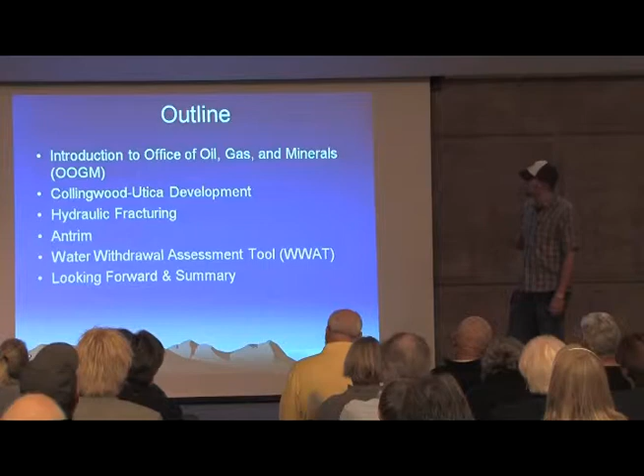Going over the Collingwood Utica development, that's what really kind of brought this hydrofracking issue to Michigan's attention. What is hydraulic fracturing? The Antrim play, water withdrawal assessment tool, so that we actually keep an eye on the water that they use.

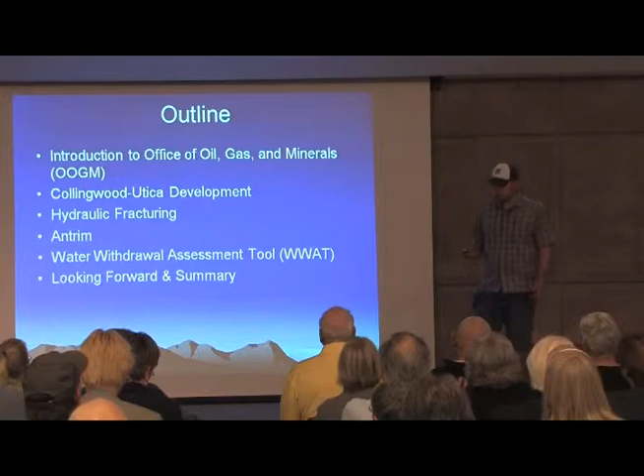Looking forward and summary. Basically, Office of Oil, Gas, and Minerals, we're here from cradle to grave, theoretical cradle to grave, on oil and gas drilling.

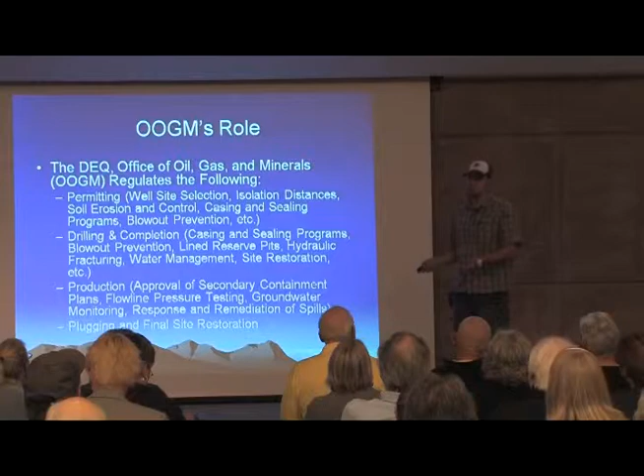Companies obviously aren't going to tell us what's going on, because once the state knows, they have to tell everybody else, and there goes their plays of what they want to do for an oil and gas drilling project.

But from permitting, there is a full review of the permits to make sure that the casing, sealing, cementing process, everything along those lines is actually gone over, verified, and ensured that there is a competent sealing, casing program and protection of Michigan's natural resources.

Through drilling completion, we're on site to make sure that they're drilling using the proper fluids. If there are a little bit of spills here and there, that they clean them up instantly, take care of the stuff, lined reserve pits, a lot of other stuff.

Some of the stuff looks like people might not be able to read at the bottom, but for the well, if it's a producer, production, facility construction, secondary containment, things to make sure that this stuff is kept where it's supposed to be and not in our groundwater, because everybody likes fresh water to drink.

Plugging and final site restoration. So we write the plugging instructions, make sure they're doing it.

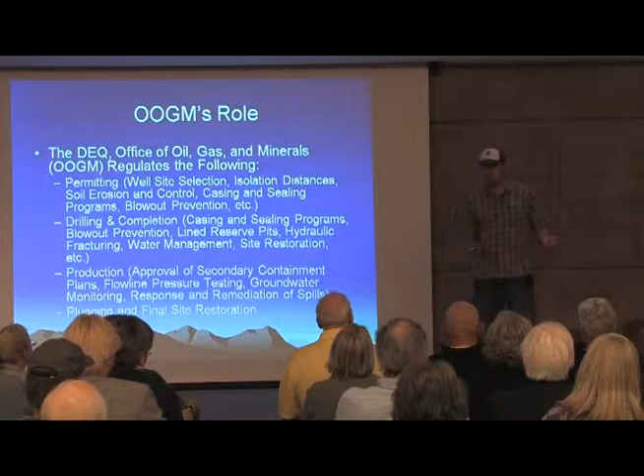In fact, my apologies, I didn't realize this was going to be so big. I don't have a shirt or tie on. I just came from watching a plugging program that I've been stuck on for the last week, so my apologies for my drab appearance.

So permitting, surface ownership and mineral ownership. That's one of the things that really causes a lot of problems. Thanks to English law established way before I was even thought of, mineral ownership is allowed to be fractured from surface ownership.

However much that might be an annoyance, I'm sorry, I have no control over it. But if you're the mineral owner, you do have control over those minerals, and you have the right to either lease or not lease your property. There are other things that can come into that, and we'll discuss those later.

Surface ownership, they still have to get permission from you if you are just a surface owner to be able to come onto your property. You don't get any of the nice mineral rights or anything along those lines, but there's that stuff.

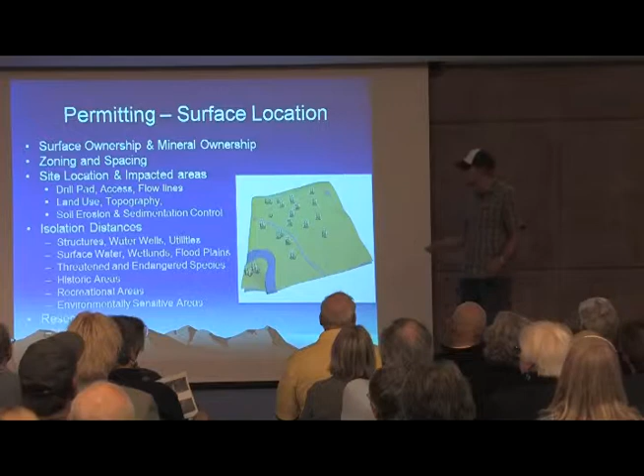Your site location, where the drill pad's going to be located, wetlands, natural protected species, soil erosion processes, things like that along those drilling pads. We go through every detail of this before they go in to drill it.

Your soil erosion and sedimentation control, isolation distances, you have to be a certain amount of distance from structures, water wells, etc. And then your reserve pit, the location, if allowable - and that's because some locations you can't have reserve pits on because the groundwater is too close to the surface, or other issues might be presenting situations that you can't have that.

There'll be a question, I'm going to try to get through this real quick so that we can have some questions and answers, but I will call on you first, sir, when we get there.

Zoning and spacing. Does Michigan law allow for local zoning ordinances to deal with this? With drilling, no.

The state has the right to it. With companies not being able to keep track, there'd be too many options out there for companies to manage, from what I understand up the chain above me. So the state just handles the spacing and zoning issues for that.

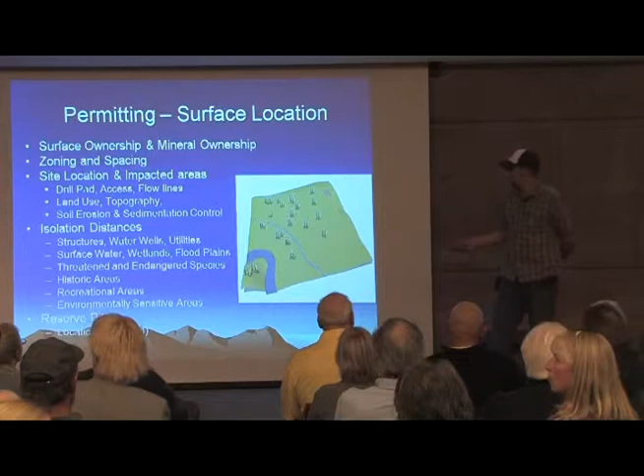So we'll go to the next one: permitting and casing. So the casing, like I was saying, we go through and review that. Surface casing, the first one, is basically made to ensure that groundwater is protected. You have to go 100 feet into competent bedrock and below the lowest known freshwater aquifer. Now this can fluctuate in multiple depths. There's formations and locations I've been at where I've had surface casing down to 900 feet, if not deeper. There's other ones where I've only had it to 500 feet, maybe 300. It just depends on the area geology.

There's a lot of science behind this stuff, and I am a geologist and I like rocks, so make your judgments right now. But I'll be going over this stuff and the different rock mechanics and things along those lines.

Your intermediate casing is something that's used on some of your deeper wells. It's basically just to ensure that there is more competency to the well bore, make sure that there is more safety and that it's actually sealed off so we have another safety control point for the well drilling. Contingency strings can be used if there's local hazards in the geology, like lost zones or overpressurized formations. Salt structures like to collapse occasionally, and so maybe you need a little bit stronger pipe in the hole.

Your production casing all the way down needs to be cemented back up so that there is a good seal around that target formation. With the horizontal stuff that's really starting to spark a bunch of interest with the citizens, there are new casing rules and cementing procedures in place that have got a little bit more protection to it than we had before.

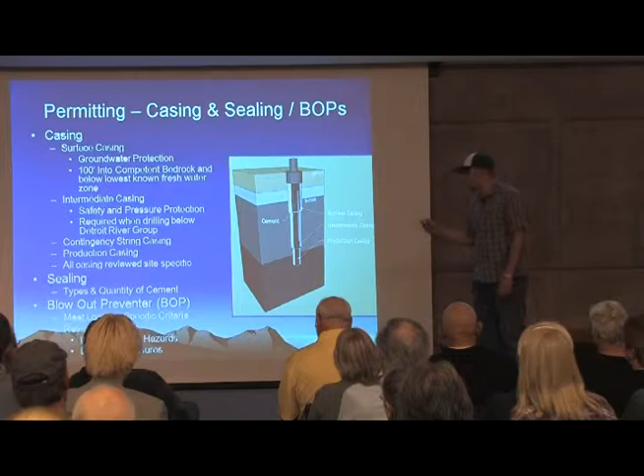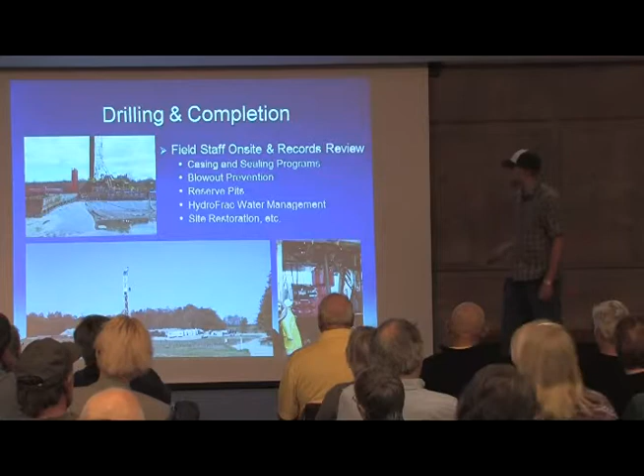Surface casing - this is going to make it look like it goes real quick, but drilling can take 3 days to 60 days, or maybe even further, depending on what they're actually doing. So if you're looking at your leases and somebody's drilling next to you, you could have a rig drilling next to you for a long time, a lot of sleepless nights. Keep that in mind.

But with your surface casing, it doesn't go that fast when they drill it in there. They got to go down 100 feet - this is showing where the base of the freshwater is, and we'll say that it's competent bedrock for this presentation. They run their surface casing in, they cement it back to surface. They have to wait 12 hours before they can even touch that casing and drill out to go into the next one.

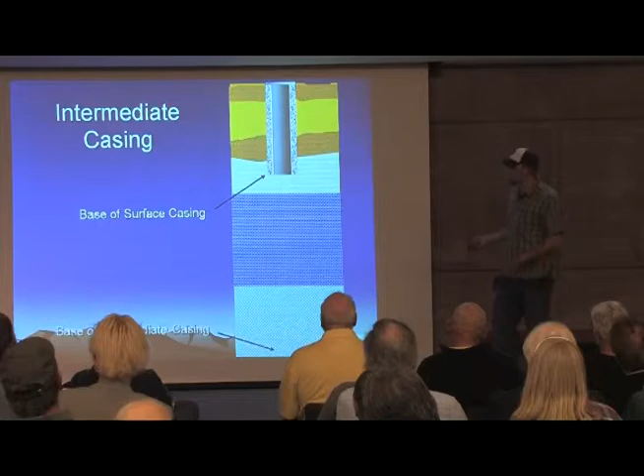Your intermediate casing string, on some of these deeper holes that you'd end up using - once again, they drill it, go with their casing, cement it back up, and then there we go.

Now your production casing, with these horizontal wells that is causing all the buzz about hydraulic fracturing - there are a couple of companies that you'll notice have a different kind of setup here. A couple of companies like to go down, drill a vertical well, and actually core. You end up getting a 3 to 4 inch core of that rock so you can see what it's made of. Is it worth doing the horizontal section, or should we just cut our losses and get out of here now? So they'll end up drilling that, and they end up having to plug that all the way back to what's known as your kick point.

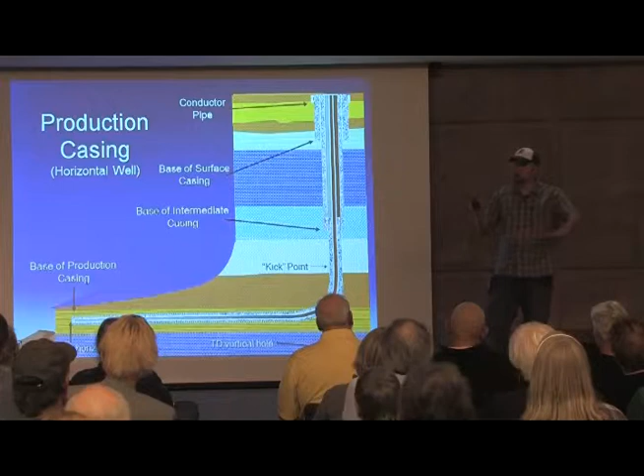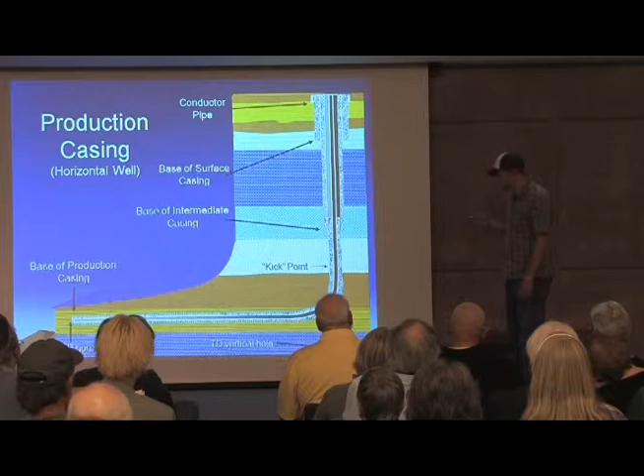The kick point is basically just where a company's going to start that nice bend to go into the horizontal section. That can last up to about a quarter mile. Steel pipe bending over a quarter mile, a lot of things are possible, so then they run the horizontal depending on how long they're going to run it.

Production companies cannot create production facilities without our approval. They have to submit plans, we change them a lot, to make sure there's secondary containment underneath these tanks. Their flow lines have to be pressure tested. If there's a spill, even if it's contained, they have to make sure everything's taken care of and safe, and we have routine inspections to cover it.

Are we there 24/7? No. But we do go there quite a bit, and it's pretty easy to tell if there's non-native soil where there used to be a nice patch of grass, so you can find out what's going on there.

And then Lansing has production and records review to ensure that everything we're seeing out there on location actually matches what the companies are submitting for truth.

Plug-in and final site restoration, we issue the plug-in instructions. We make sure they get the system so there's no erosional conditions. The one thing is they're not going to make it back to that beautiful prairie you might have had before. They're going to go in, level it, and it becomes a flat square.

So most of your average ones around Barry County would be maybe a 200 by 200, or maybe a 300 by 300 site. Hydraulic fracturing pads require a lot more space, they're massive, a lot bigger. So you are going to have a nice open wooded area.

If it was a wooded area, they don't plant the trees again. They just go out there, seed it, make sure there's no erosional issues, vegetation's established, and the well's cut and capped below grade, what's known as plowable depth. It's about 4 to 5 feet down, and that's what you end up with if it's a dry hole.

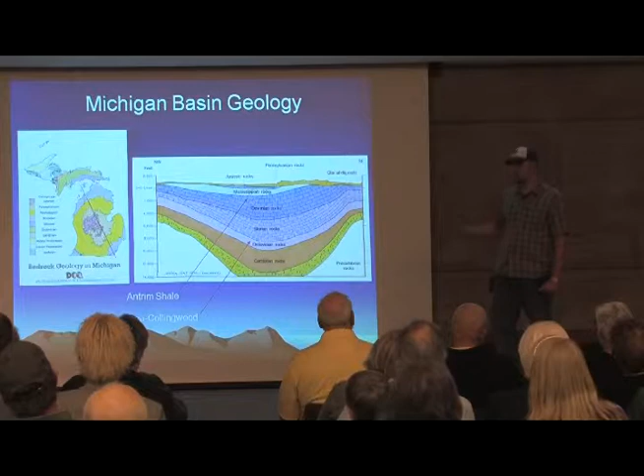But you've got your different ages of rocks, and in those are different formations that have oil and gas bearing potential. One is the Antrim Shale, which we'll be talking about, a relatively shallow formation that's had a lot of play up north in the northern lower peninsula. And the Utica Collingwood Shale, which has brought this really to the forefront of the media and citizens' concerns, also in the northern lower peninsula. None of those are... well, we'll discuss that later.

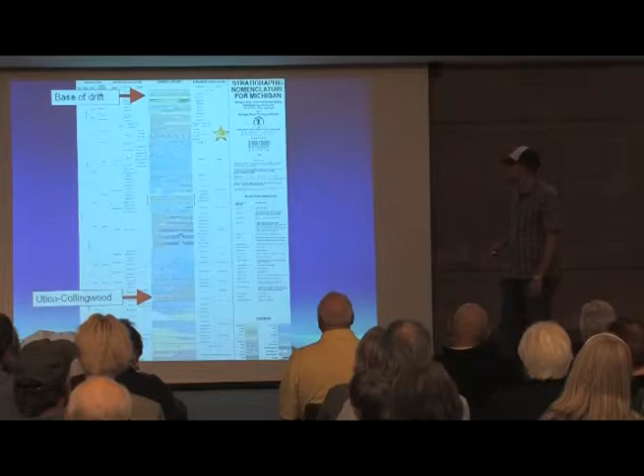So, Utica Collingwood is pretty deep, but as you saw from that bowl-shaped geology, depths vary depending on where you are in the state. Our base of drift — drift is the sand, rocks, dirt, topsoil that's under our feet, that's what drift is — that fluctuates throughout the state as well. I think it's 22 feet in some areas and 900 in others.

So the Antrim is this nice star right here, and that's just to show you the approximate closeness of that to the base of drift. This is not to scale, it's to show you all the formations that we know about.

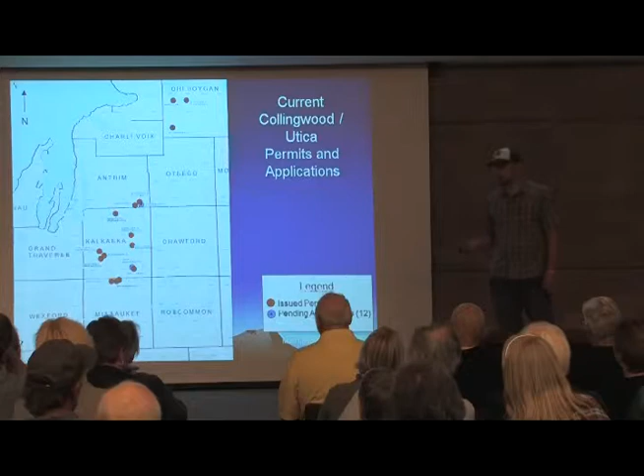So the current Collingwood Utica permits and applications: as of now there's about 21 permits that have been issued. With gas prices being so low, it seems companies don't even want to go in and explore it, because if you're not going to make your money back, why would you drill the well in the first place? There are pending applications right now because companies are interested in this — there is a potential good source of gas here.

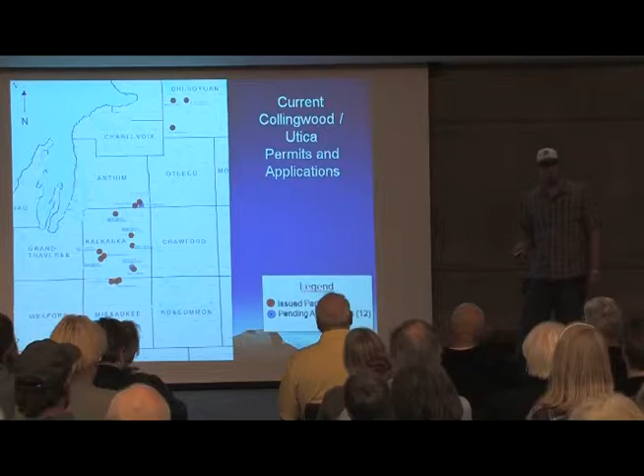It is in a tighter formation, the tight shale rocks—well, Collingwood is actually a limestone, but we'll get into that later. So, Utica Collingwood geology, bear with me, I'm a geologist, I've got to talk about rocks. Your Utica shale, that's a big play they're getting into in eastern Ohio right now.

You may have heard about it in the news. They are doing these large-scale hydraulic fracturing systems down there and finding extremely good quantities of gas for production. The difference between the Utica shale in that eastern Ohio play compared to Michigan's is Michigan's has a much lower organic component. Lower organics means less production of gas or oil from whatever is dying and decomposing in there.

The Collingwood, however, has always been thought of as a shale until just this recent play, and it's actually a dark, organic-rich limestone. Looks like a shale, acts like a shale, but it's actually a limestone. So with some shale-like attributes to it, the hydraulic fracturing they've used on it is basically one way to help release those oil and gas components.

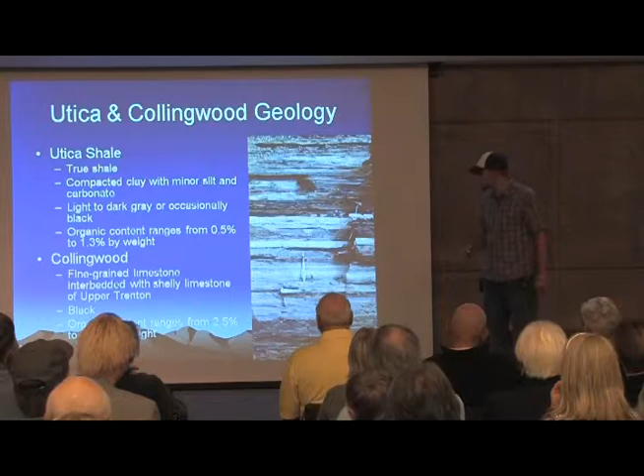So our drilling and casing program, as I was saying, fluctuates from one spot to the next. There is no standard well program. Your conductor pipe—this one based off of wells in Kalkaska and Missaukee counties—is driven anywhere from 60 feet to maybe 100 feet. That's just to get a starting point for the people to start drilling.

Everything about this is a normal oil and gas well until you get into that kick point to begin the drilling. Then your surface casing for these wells goes into the Coldwater Shale, at 704 feet—some are actually a little deeper than that. It's to ensure there's complete coverage of those freshwater aquifers.

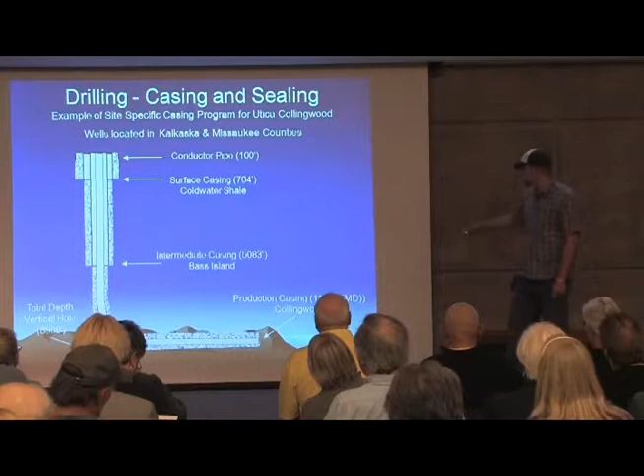Your intermediate casing shoe is down in the Bass Islands—it's competent rock down there, but you can see it's at 5,083 feet. Then you get into your production casing. The true vertical depth is actually only around 8,900 feet, but the measured depth is 11,133 feet. That's a really long section of hole drilled horizontally.

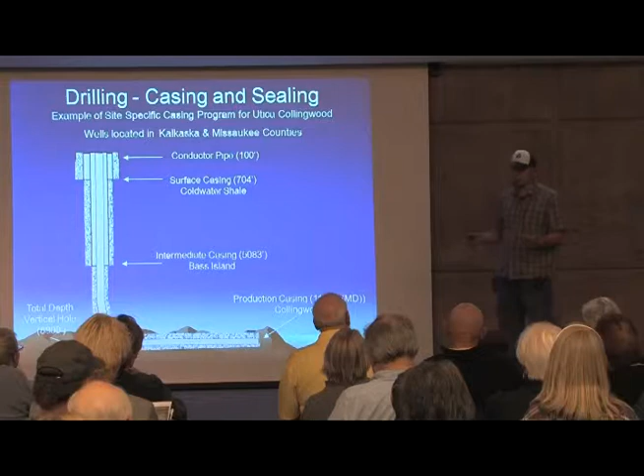So the main reason to do that is to open up more formation to get more exposure so you can get more oil or gas—whatever you're looking at—for this particular case, gas.

So then we're looking at Cheboygan County further north. You can see there's a big change here. Your conductor pipe is basically the same, 100 feet. The contingency string though—there are formations up there with soluble bedrock that you don't want to drill through and let the rock dissolve, and then all of a sudden you have these giant caverns down there. So we end up having a contingency string to ensure the hole stays competent while drilling through those cautionary zones.

To get down to your surface casing—it's now at 1,300 to 1,400 feet. That's pretty deep, but it makes sure all those usable aquifers are cased off, because there are bedrock formations that people have water wells in. If there's a water well there, we've got to seal it. We've got to make sure nothing gets in there to cause problems for it.

Your next intermediate casing goes into the Niagara Formation, which has a bit of oil and gas play to it, and then your production string goes all the way down to the Collingwood. So for this particular case, you've got 4 strings of casing plus your conductor pipe, but I don't count that as casing.

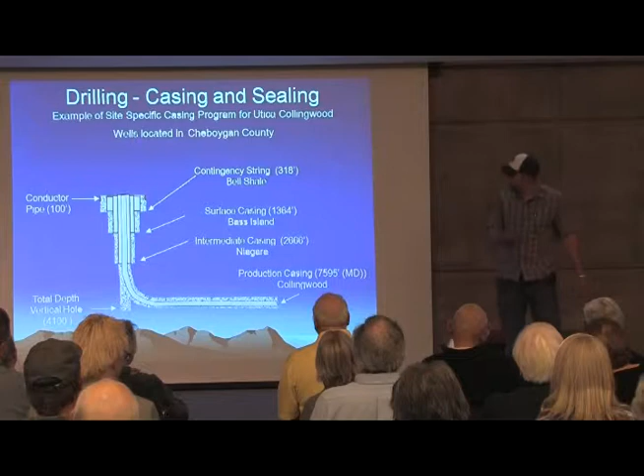Spacing issues are really coming up. Your standard spacing is 40 acres for most wells. Some others are in 80-acre spacings. Others, like the Collingwood, have nothing really set for it—it used to be just a junk formation everybody wanted to get through, and who cares about it. Now it's something of interest, and we need to find out what the actual drainage of that is.

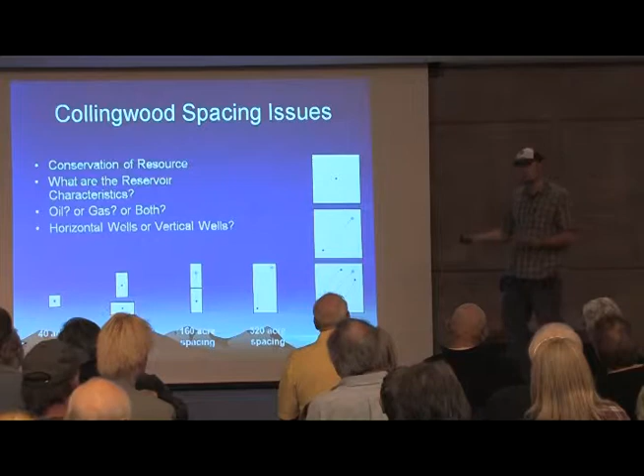What makes sense? We don't want to have wells on top of wells on top of wells, because that really wastes our natural resources at the surface from making these drill pads. So if we find out that it's 640 acres, a square mile, then that's what the spacing will be. There's currently a hearing going on about that, and eventually a decision will be made.

Your large volume hydraulic fracturing water usage.

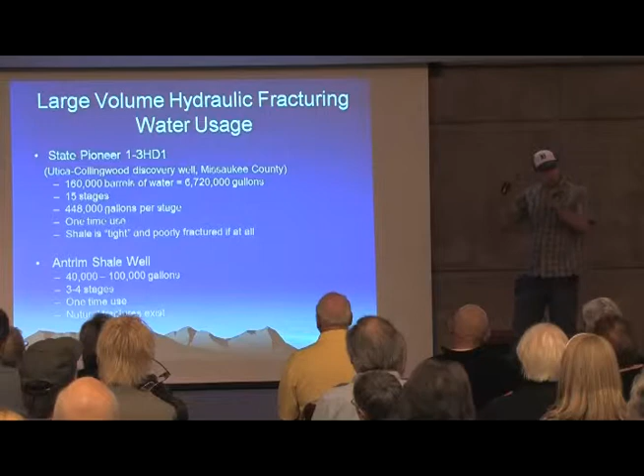This is something that really scares a lot of people. You hear about it - here in the State Pioneer, 6.7 million gallons of water was used. This is done in 15 separate stages for hydraulic fracturing, and we'll go over that in a bit, but this is a one-time use. In comparison, they withdraw it, and I'll tell you about the things we have in place to make sure nobody's wells go dry. They withdraw it and use it with their mixture to actually get into the tight shale to fracture it. Your Antrim shale wells, which have been around a long time, use around 40,000 to 100,000 gallons. It's a vertical well though, so a little different, but hydraulic fracturing is still used to help open up naturally occurring fractures in that formation.

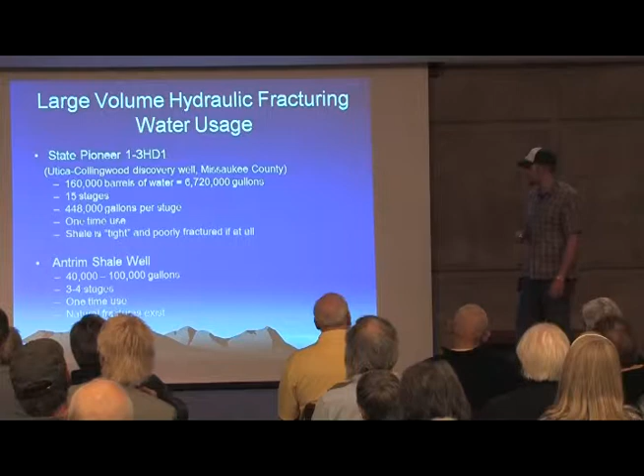So how much is 6.7 million gallons? Here's some things to put it into perspective: 10 Olympic swimming pools, or roughly 10 acres of corn use over a growing season. That's a consistent draw from irrigation systems over the whole season, spaced out over a longer period of time compared to a shorter period of withdrawal here. Or your golf course in roughly 33 days - definitely not a fancy golf course, more of a hack course.

But with that withdrawal, there's a big concern. As you put big stress on your aquifers, if you're pulling out all that water, you get a situation where your water table actually starts to cone or depress downward because you're having a large draw on it.

What we have in place is, with any residential well that's within a quarter mile of that source well, they have to have monitoring wells in between, monitored on a daily basis to ensure that as they're going through water withdrawal for this hydraulic process, the water table does not dip. If it dips, stop what you're doing and see what happens. If it rebounds, okay, we can start that process again. That's to ensure nobody's well goes dry while they're doing this process.

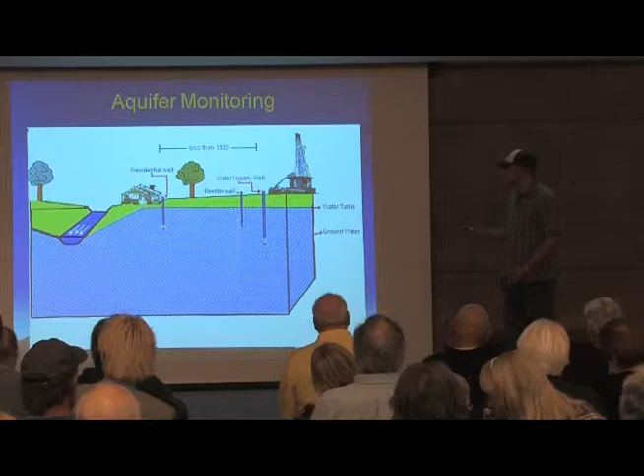Depending on the soil they're pulling from - maybe it's a sandy soil, water easily moves through sandy soils. But let's say it has a really high clay component - water doesn't move that well through clays, so there might be a slower rebound. We want to make sure no one has to worry about a dry well - there's nothing worse than going to the faucet and not having anything. But the water does rebound, and it ends up being replaced through the whole water cycle, and we'll go into that also.

Hydraulic fracturing - what is it? It's actually just a completion process for the well. There's a lot of talk that everything, from trucking etc., is hydraulic fracturing, but what actual hydraulic fracturing is, is a procedure used to complete some oil or natural gas wells. They pump water down the properly sealed, cased well into the target formation, varying in depths, and actually perforate into the rock, forcing it at a high pressure, higher than the natural pressures of that rock formation, to cause those natural fractures to either open up or to create man-made fractures, to get the sand in there and open up those formations to let the gas or oil come out easier, to make it a producible quantity.

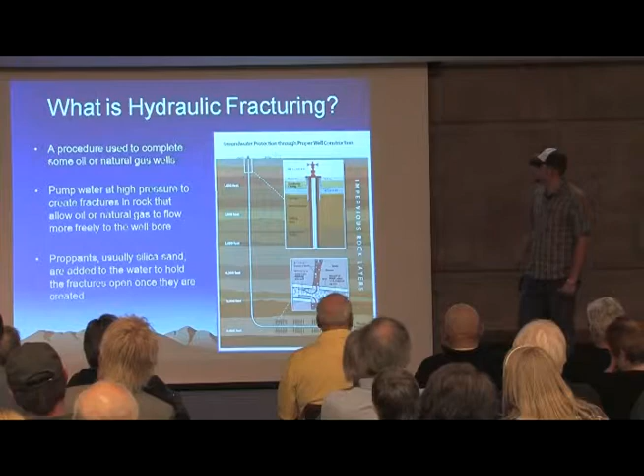Proppants usually. So again, hydraulic fracturing - there's a bunch of different dictionary terms out there, and you'll see a whole bunch of other descriptions of it. Basically, it's a process to complete the well. They use water, sand, and a small contingent of chemicals, pumped down the well at high pressures to open up the fractures in that formation to help release gas or hydrocarbons that they're looking for.

But still, you know, it's 99.5% water and sand, and 0.5% is chemicals. But 0.5% of 6.7 million gallons is still a bit of chemicals. This is all stuff that's contained in systems as you're pumping it down into the formation - it's not something they're just throwing all over the location.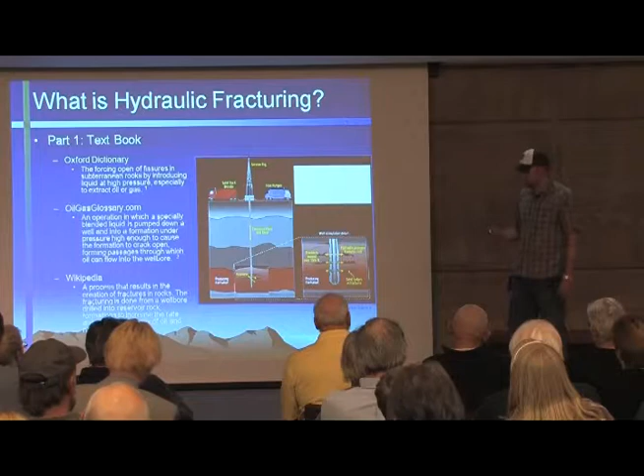There's a lot of problems with the debate on it. You have your lobbyists that say hydrofracturing is just this little tiny thing right here. Then you have opposition groups, which include a lot of other stuff from drilling, trucking, everything along those lines. It's even some things that aren't even related to hydraulic fracturing.

The main concern is really, in all seriousness, probably somewhere in the middle, because there are things that go with hydraulic fracturing, truck traffic, things along those lines that you can associate with it that might cause disturbances or noises in the community. And there's other things that aren't really associated with it, like some of the things that I've seen on some websites.

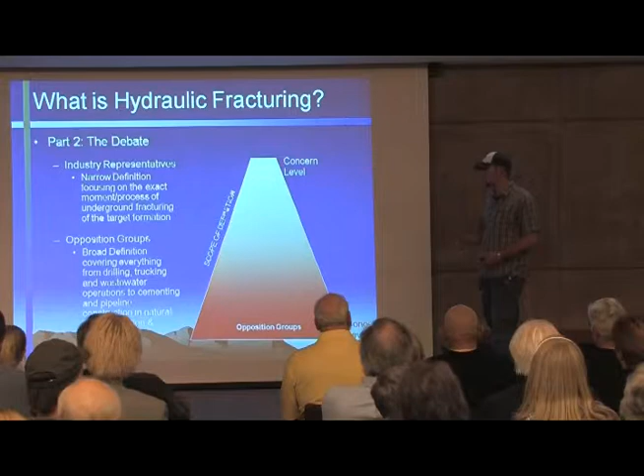The history of hydraulic fracturing is not brand new. It's been around since 1947, at least that's the first one on record in Kansas. Good friends Halliburton decided to get the license in 1949. Over the next years, we've actually had improvements in understanding of rock mechanics, which chemicals actually work better for it, modeling, some engineers have gotten into it, and there's a lot of information and a lot that we have learned about it over the time.

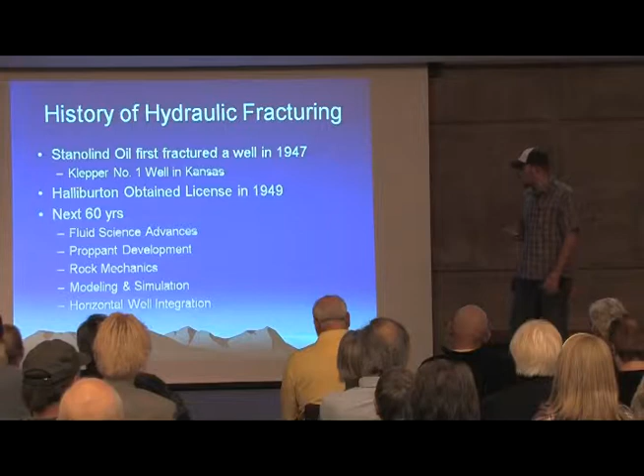In Michigan, state regulations, we have casing, sealing, water withdrawal. We oversee the whole process of it. I can't stress it enough that everything in this is reviewed and there's no item that's overturned.

We review the completion plans. The MSDS sheets are on location, and recently we have been starting to put them on our website as well. We are also working with fracfocus.org to get those chemicals on there.

Depressingly, there are some federal laws that do not allow us to disclose certain trade secret chemicals. It sounds like the Democratic Party and the Republicans are trying to work together to try to get that as a law for here, but we'll see how that ends up turning out. But if you've got something that works great, you probably don't want to let your competitors know about it, so I guess I understand.

Hydraulic fracturing in Michigan, though, the first well on record is in 1952. It was done up in Lake County, and since then, over 12,000 wells have been hydraulically fractured in Michigan. These are mostly in the Antrim plays up here in the lower peninsula, the Antrim shale. They're relatively shallow, and they've had over 12,000 wells done.

All of this has been done without a single incident, any sign of adverse impacts to public health or the environment. So 12,000 wells, the track record's pretty good, but that doesn't mean that you pull back and say everything's fine. You still have to stay on top of this stuff and make sure that it's good.

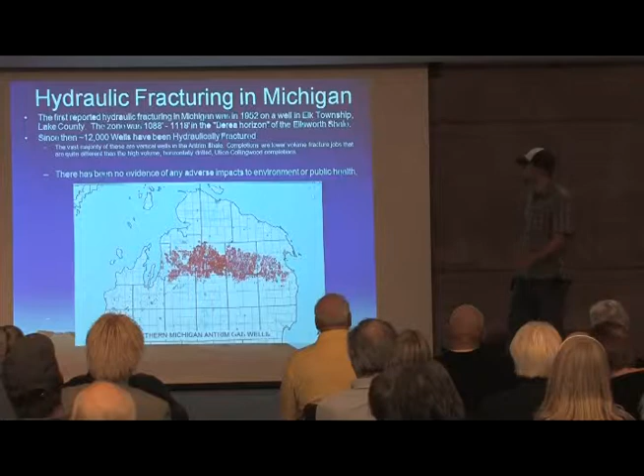The vast majority are in the Antrim, I already said that. But this is what I was talking about: your normal drilling location. From what I understand, most industry representatives in Barry County are looking at dolomite, limestone, maybe some sandstone formations. It sounds like land leasing, no one is even willing to put in there 'do not hydraulic fracture' on my property, in those leases.

It depends on the company you're looking at. Of course, the companies aren't going to tell me what they're looking at, so maybe there is the possibility, but I don't foresee it. I have been wrong in the past, though.

This location is ginormous. That's a school bus at the top. So that gives you a nice little scale there to show you exactly how big this is.

Your freshwater pit causes a lot of concern too. People think that this is a pit where they are mixing these chemicals and everything up together. There is nothing that can go in that freshwater pit besides fresh water, maybe a duck lands in it or something along those lines, but that is solely for fresh water, for staging area, so that they have that water on hand, because when they go to do this process, you're moving a lot of water, a lot of fluid, and a lot of sand all at once to crush that down. You need these storage spaces to have that fresh water. So no chemicals, nothing but fresh water in there.

You've got your different systems here of your frac tanks, your pumping trucks. There is a lot of commotion going on here, a lot of traffic going on to this location, and as you can tell by the scale, it is a bigger location.

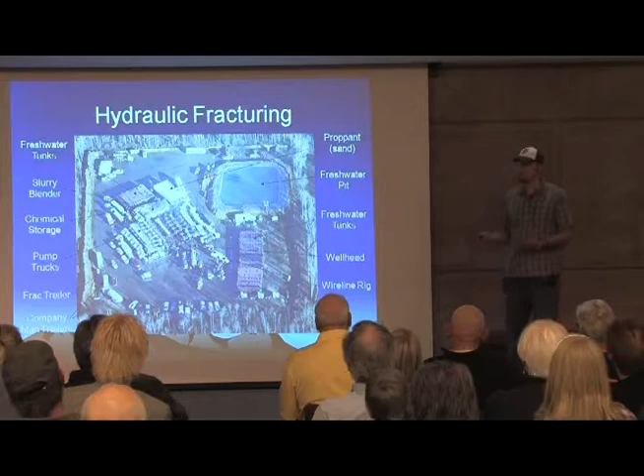Hydraulically fractured locations need a much larger scale. Most of your normal wells are 200 by 200 feet, maybe 300 by 300. The 5 most common issues: migration of gas or fluids into fresh water or to other formations.

Some people might not care if something goes to another formation, but I do. I like to try to keep everything in the formation that it's supposed to be in.

Your identification of chemicals and additives - we require the MSDS sheets to be on site. If something were to happen, we know what we need to chase. Even though they're trade secrets, they still have to let us know what chemicals are there, or the overall chemistry, so if something were to happen, we would know how to respond.

Your management of flowback water. There's been all sorts of stuff on the internet about where flowback water goes. In Michigan, no flowback water can go to the reserve pit, where the drill cuttings go, nor to that fresh water pit. All of that flowback water has to go to concealed frac tanks that are on plastic liners so there is no possible leaking into the area. I'll show you some pictures of the stuff I'm talking about. There's a lot of jargon here, and I'll try to minimize it so it's more understandable.

Your surface spills - that's where I'd be more concerned, if something were to happen at the surface. The fluids being injected are thousands of feet below your feet. If it was going to come to the surface, the oil and gas in that formation would be coming to the surface as well. So the only reason we're getting that oil or gas is through the well.

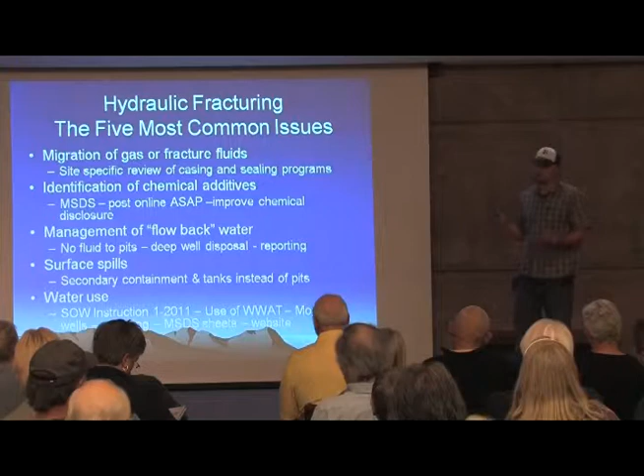And then water use - it's a big concern, water is valuable. But with our water resource system, we can keep track, know if that's an okay location for it or not, and we'll discuss that in just a little bit too.

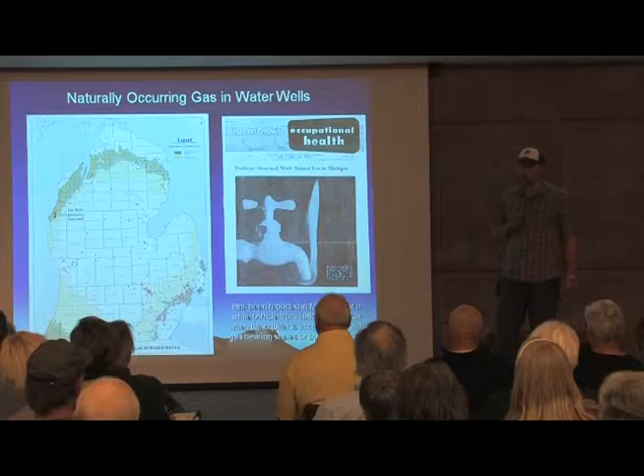One of the things you hear a lot about is somebody's faucet lighting on fire. It's not a funny situation if you're the person whose faucet is lighting on fire. Let's look at a couple of situations on this left map. These red dots - it's kind of a dissipating map, but you can see these are areas where there is gas in the water well. These are all documented locations prior to oil and gas drilling. Let me emphasize that - these are all locations prior to oil and gas exploration.

What happens here is what's known as subcropping. You have a formation that has oil or natural gas in it, and it subcrops - it comes up, instead of an outcrop like you'd see on mountains, or like down 94 by Jackson where you've got that sandstone sticking out. I think it's cool, you go through that. The rock has the natural gas or oil in it, and it'll actually migrate into the aquifer. There's nothing we can do about it - that's just what nature is going to do.

There's locations in Pennsylvania and all over the place that have that. I don't know too much of the details on the Pennsylvania stuff - I like to focus on Michigan. This is my state, I want to protect it and keep it safe. But this is just to let you know.

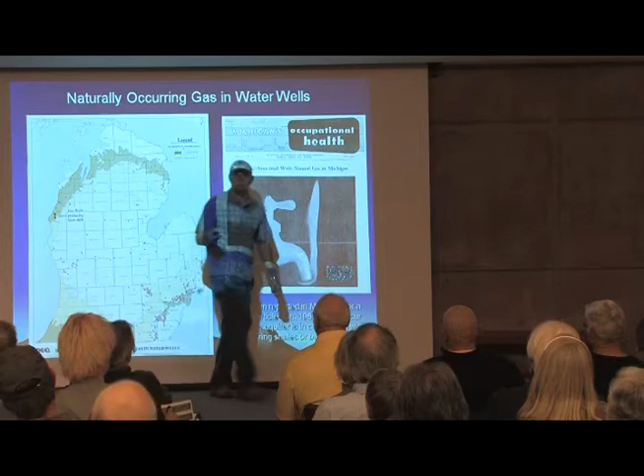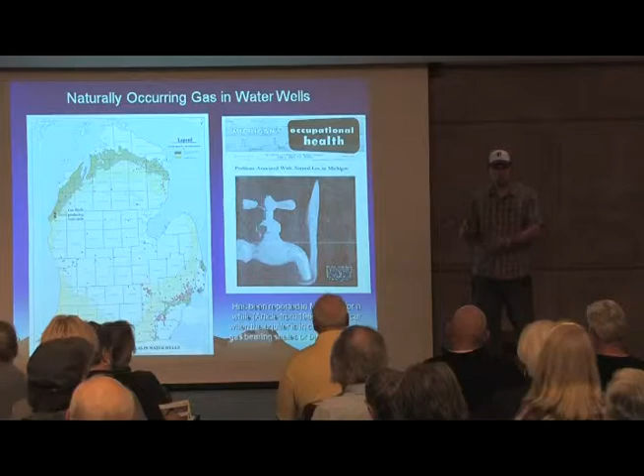One of the big things you might see - we have 3 gas wells that are actually producing in the drift. They drilled down, and boom, hey, we got gas. These are still currently producing in the drift because of these rock formations that come up to the drift, subcrop, let off that gas, and then they're actually pulling the gas from that, which I think is a great idea so it doesn't go to other people's locations. They're producing it from there, so there is naturally occurring gas - it's called biogenic gas if it's organic material decomposing, or if it's just naturally coming into the formation.

What's in frac fluid? It's a little outdated - 2008 is the source we have, but this gives you an idea of what's going on with it. You have all these different things that get thrown around - your surfactants, your chlorides, your scale inhibitors, your gelling agents. There's a lot of different things in here that no one seems to know.

If I wasn't in this area, I wouldn't care what these chemicals were, I'd just wonder what they are. But these are just things that help keep the sand in solution in the water, or help the rocks fracture, or help it open up. They help get that sand in there and keep those fractures open to produce the gas. Some of them are biocides, to make sure that no munge grows in there and seals off those fractures, because if that seals off those fractures, your well's pretty much going to be dead.

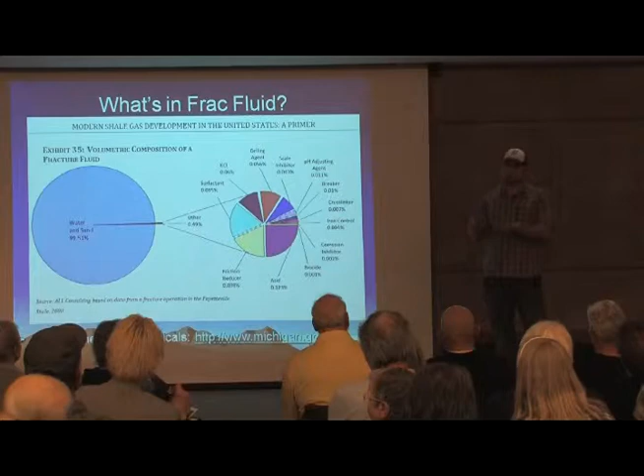At the bottom here, your MSDS sheets for chemicals can be found at michigan.gov. That other site is wrong, it just got nixed by our tech group, so I'd just go to michigan.gov and in the upper right-hand corner search Office of Oil, Gas, and Minerals, because the ones and zeros and dashes and dots, no one can ever write that down and get it right.

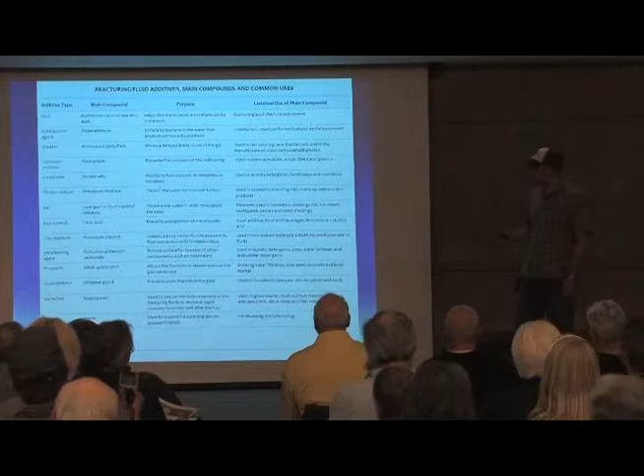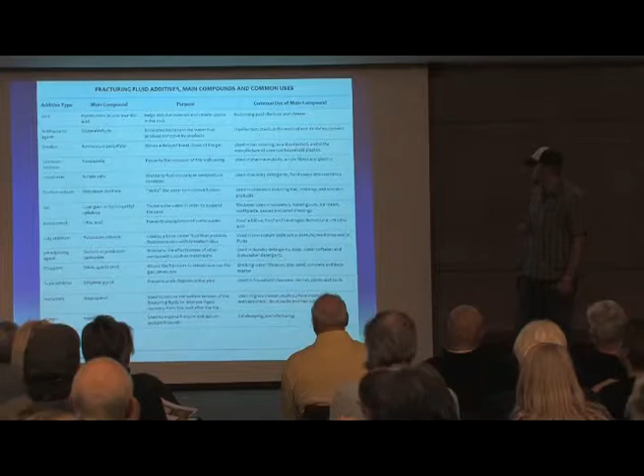You can't read these, I'm sorry, but this is supposed to be showing you what fracturing fluid additives are. This comes from Chesapeake Energy, they've got this stuff on the web. Chesapeake Energy has actually been very forthcoming with information, trying to let people know there's not too much danger for this. Their most plays are in other states, I don't get to work with them, but there could be some concerns there you guys are well aware of. With this, it kind of breaks down what these things are and what they're used for. I wish I could make those bigger so you can see them, but they try to relate the different things to what's already in use in Michigan.

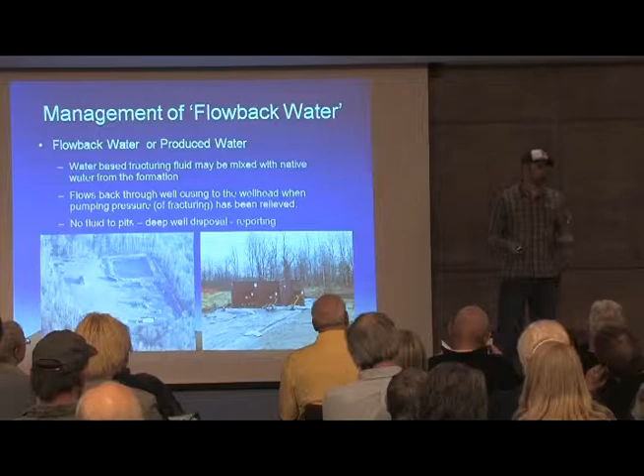Your deep well disposal - not all the stuff comes out, I'm sorry, but this flowback fluid comes out. They have to dispose of that down disposal wells that are pre-approved by the state to make sure they're not just dumping it someplace randomly. Roughly 25% to maybe 75% of the fluid comes back. The remainder stays in the formation and slowly gets produced with that water that might come out with the gas. That same stuff has to be disposed of down the proper disposal wells, so none of it is ever released into the environment.

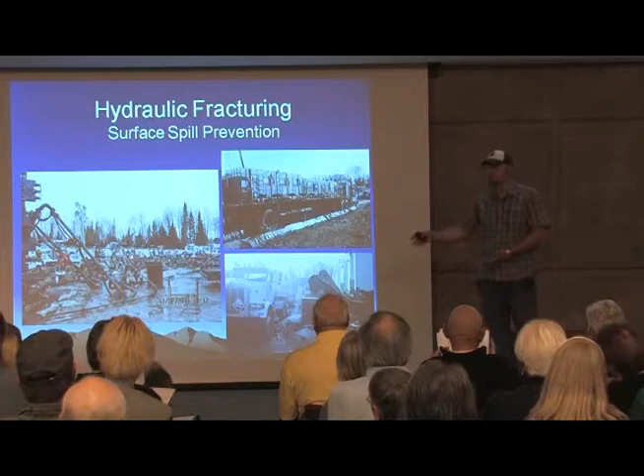Hydraulic fracturing surface spill prevention - all these trucks with all these chemicals have to be on secondary liners, bermed, to ensure none of this comes in contact with the soils. If something comes in contact with these soils, we are there to say get that stuff up now, make sure it's all set, verify that it's clean. You can see this is a crazy system on the left side - a lot of pump trucks, chemicals, sand, a lot going on, but all of it is contained on that area and we're going around making sure. If the liners get torn, they have to repair that spot because that's a source where it could possibly go into the groundwater.

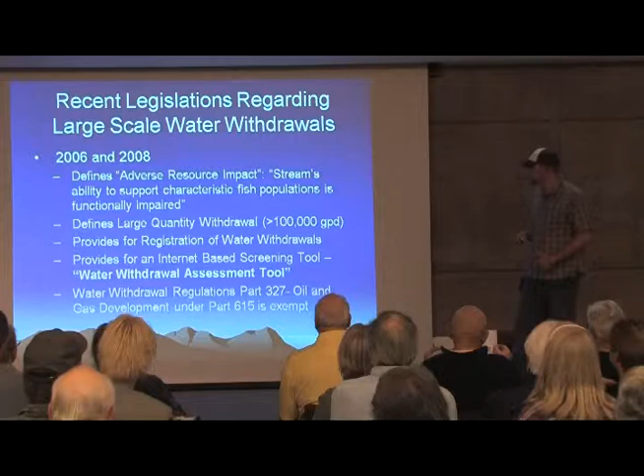There's been a lot of recent legislation regarding large-scale water withdrawal, and it basically started from a lot of these water bottling plants. But because of that, it gave us a foundation to start protecting against large water withdrawals for these hydraulically fractured wells, the large-scale ones they're looking at, to make sure that if anything is over 100,000 gallons per day, that is a large water withdrawal. 6.7 million gallons does fall over that, so they are deemed to the water withdrawal assessment tool, which they have to go through before they can even apply to us.

Supervisor of Wells Instruction. With these horizontal large-scale fracturing jobs, the state has come up with new systems on how to do these large withdrawals, what they have to do in order to get a permit through us, the hoops and everything that they have to jump through in order to make sure things are safe.

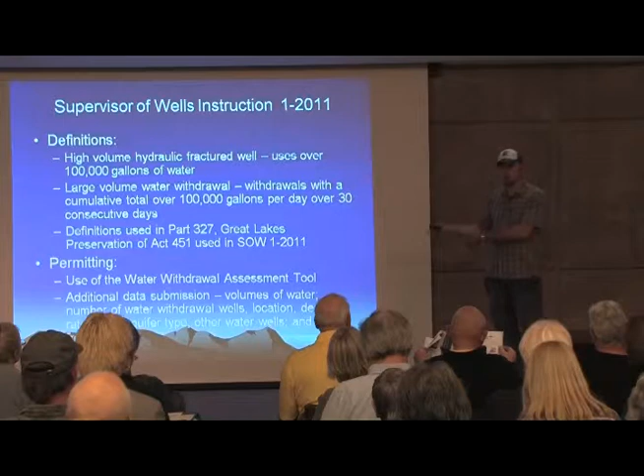If it comes back that that's going to be an impact to the environment, they cannot do that water withdrawal. But that doesn't mean they still can't drill the well. They can choose to get the water from another location. So there is that situation of they could still drill the well, but they could buy water from someplace else, a potable source, something along those lines, and use it from another place.

But in that same situation, we would then have to have them run that water withdrawal assessment tool to ensure that wouldn't harm that community or wherever they are pulling that water from. There's a lot of hoops and stuff they have to jump through in order to get these permits.

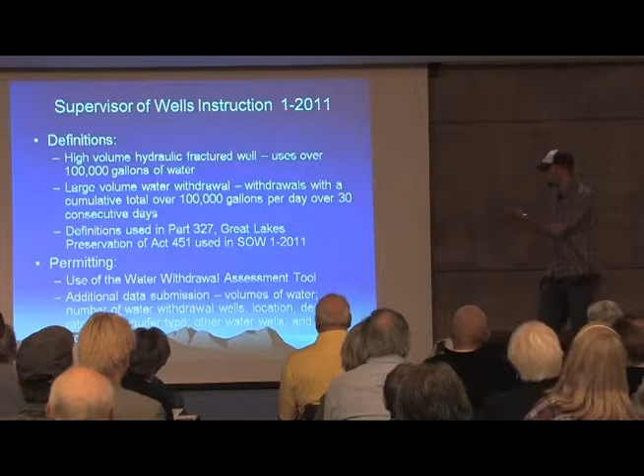So then permitting, we review all their information, their additional data, etc. Continuation of that, your completion, there has to be monitoring wells in place to ensure that everything is going fine. Your freshwater pit shall not create a hazard. That was a giant pit. You just have to make sure it's flagged off so no little Bambi or anybody falls into it and goes for a swim, because then that could just cause a problem.

Monitor and record injection pressures so that we know what's going on while it's happening, so that way we know it's going where it's going. Your reporting, your MSDS sheets have to be on location. Your service company records, we review all of that stuff. We know what's going on when we're on site.

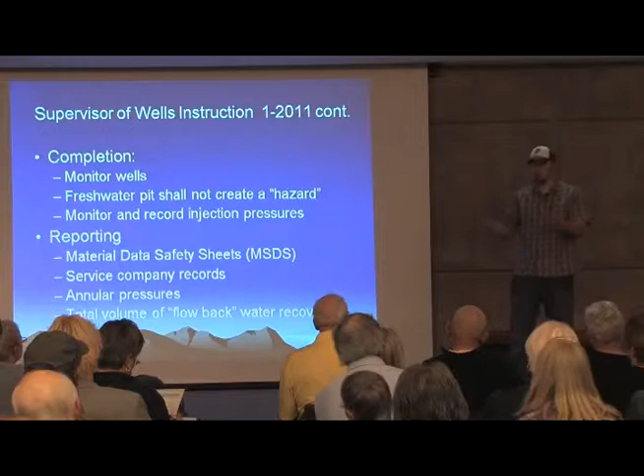With that stuff going on too, monitoring your annular pressures, because a big concern is you're putting all this pressure down here, what if it's coming up the backside, with the sealing process of these wells. It's next to impossible, but with that, you're watching those annular pressures to ensure that nothing's coming up. The annular pressure is the space between one string of casing and the next string of casing. If it's increasing, then we throw the emergency brake, let's see what's going on, monitor the situation.

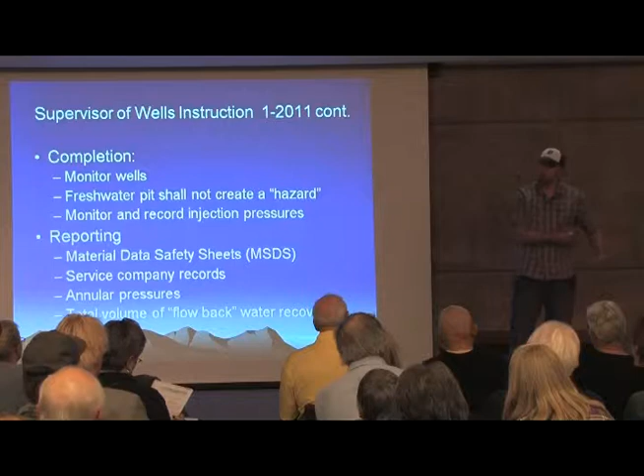We haven't had any of those issues so far, hopefully there won't be any issues of that in the future. And then also keep an eye on what's all this flowback water. Flowback water is the initial water that you're using to fracture it. We want to know how much is coming back, so that way we know how much to expect with the future produced water that will be coming with that natural gas.

The water withdrawal assessment tool is a fantastic tool that's been put on. You can go on and play around with it to see what it actually does. However, please do not register what you are doing, because that throws off the system and then we have to fix it up and everything.

But with that, you go into that to make sure that everything's fine. It goes over a whole bunch of different situations, basically based on groundwater feed streams, which supports fish populations. There's no groundwater, there's no stream, there's no fish. So we want to make sure that this water is there and it's going to be fine and the environment is not impacted. They have to go through all these models to make sure that it is before they can even withdraw it.

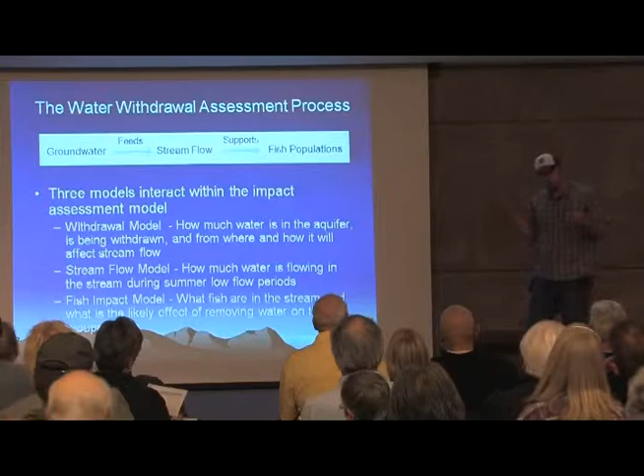But oil and gas industry is volatile. Things change, a situation might occur. While they are going through that, we are working with them to make sure that there is nothing that's going to impact or change the situation. We work really well at making sure that there is no chance for this water to be taken away from somebody and cause problems later on.

The water withdrawal model is basically, distance matters, it really does, but also soil dependency matters. So geology, there I am again. With that, you're looking at something of they're pulling water out. If the soils are something that's going to be very impacting, or it's clay enriched, it's going to be hard to basically rebound and pull that water back in, then that's going to be put into the system to make sure that that's not going to cause any problems.

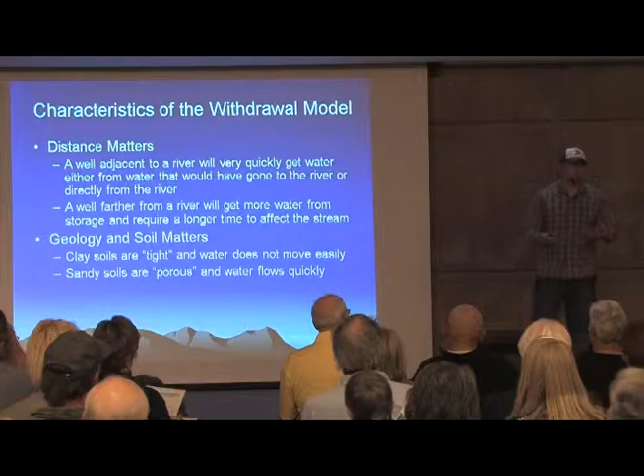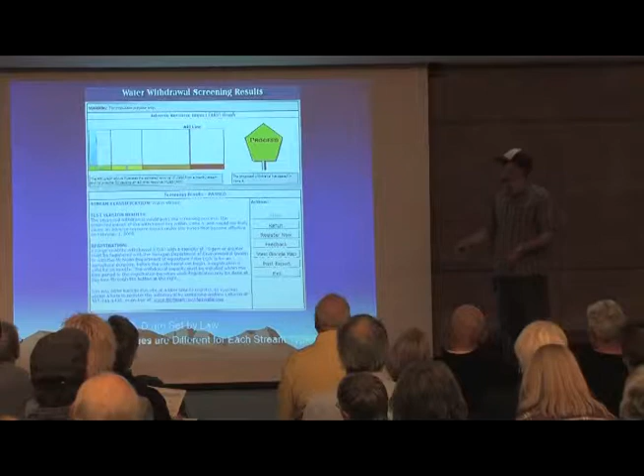It knows these locations and what's going to be happening with the different seasonal changes, so we keep an eye on that. If they fall into the theoretical program they're looking at and they come out with an A or a B, if they get an A, they can proceed with their ideas.

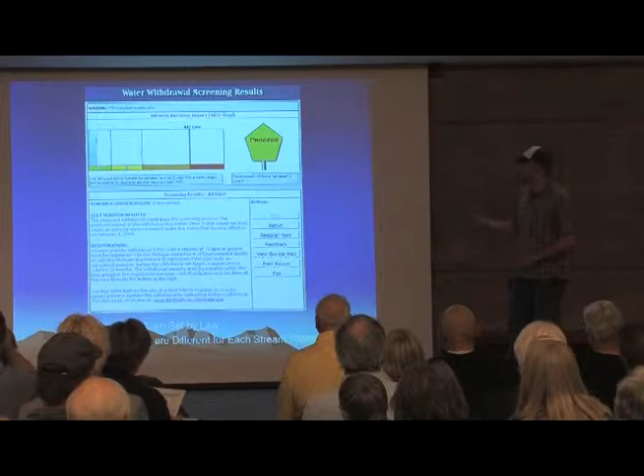We still have to monitor that to make sure they're doing what they're supposed to, and if something changes, we have to rerun the tool to make sure it's fine. If it comes up in the B or C range, we have to review it to make sure it's going to be fine, maybe with a little different detail. If it's a D, you're not proceeding. Regardless, we still look at it even in the A range because you have to be sure.

Water withdrawal analysis for high volume fractures - we review and oversee it to make sure there are no adverse resource impacts. You'll hear people say ARI. There are too many abbreviations for too much important information, but adverse resource impact analysis is to make sure we're not taking somebody's water, not taking water away from a stream, and not causing the little guppies in the stream to die. We're going to make sure that's taken care of.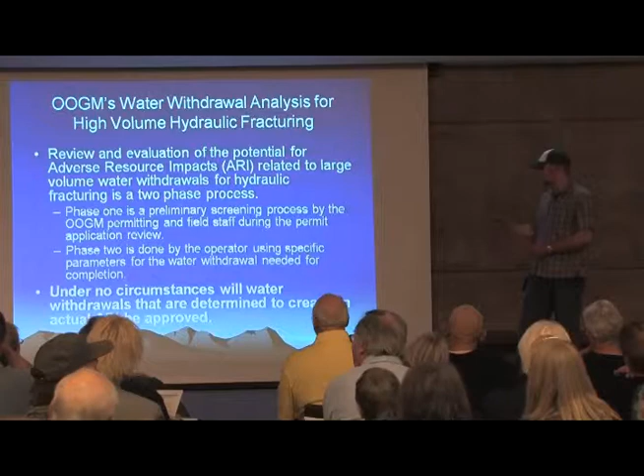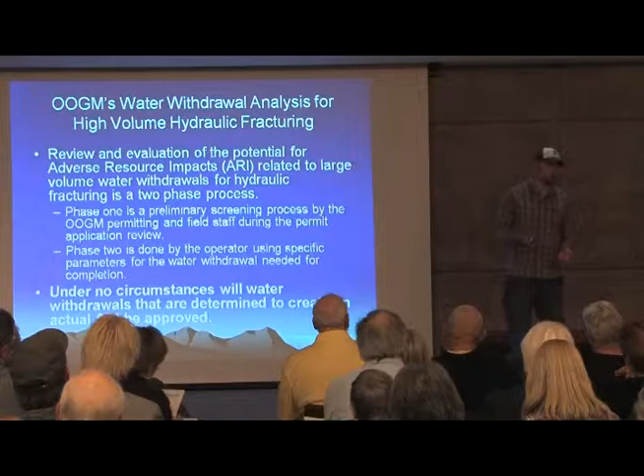Under no circumstances will water withdrawals that are determined to create an actual adverse resource impact be approved. That just can't happen - there's no way we can allow that, because it completely defeats the basic mission of the DEQ, which is to protect public health and our natural resources.

So, summary and looking forward - there have been regulatory changes, and it's always changing, that's the way it works. If we were drilling like we were in the 1930s, this would be a very different discussion I'd be having up here. But we're not - we've learned from our mistakes and we move forward with that.

We've looked at the things, and in all seriousness, think about it - we've had over 12,000 wells that have been hydraulically fractured without a single incident related to the hydraulic fracturing process. But this is the energy sector, and there are no 100% guarantees in life, so there are things to be concerned about.

I believe some of the other people in the crowd have probably done research and seen things that may have happened in other states. There are things that are still under inspection and being figured out.

The one thing is, our track record in the state is great, and that's because we have a fantastic regulatory system. We make sure that fresh water is protected, and that wells are cased, sealed, and properly worked to ensure there is no migration of fluids to other places.

Other things they've just started, which are not a law but we make companies do, is to make sure there's more cement in the production string above 1,000 feet above the kickoff point, to ensure that it's properly sealed off, and that way there's no extra potential or possibility of things happening there.

Looking forward, EPA - we're still looking at a lot of reviews they have out there. We've got public outreach, but that website has been kiboshed. So just go to michigan.gov, search Office of Oil, Gas, and Minerals, and it'll take you to sites, links, and a lot of information there.